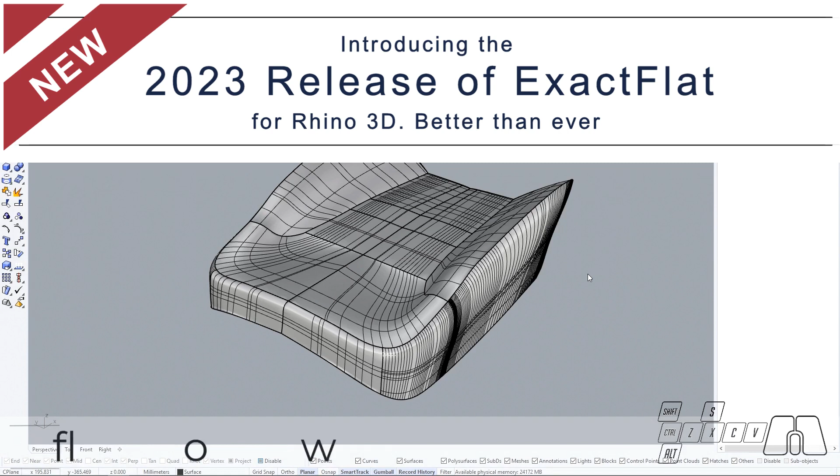During today's video, we're going to be covering the upcoming features that are going to be available in the next ExactFlat release. We're going to go through a full overview of the ExactFlat workflow, and we're going to use this car seat 3D model as an example file.

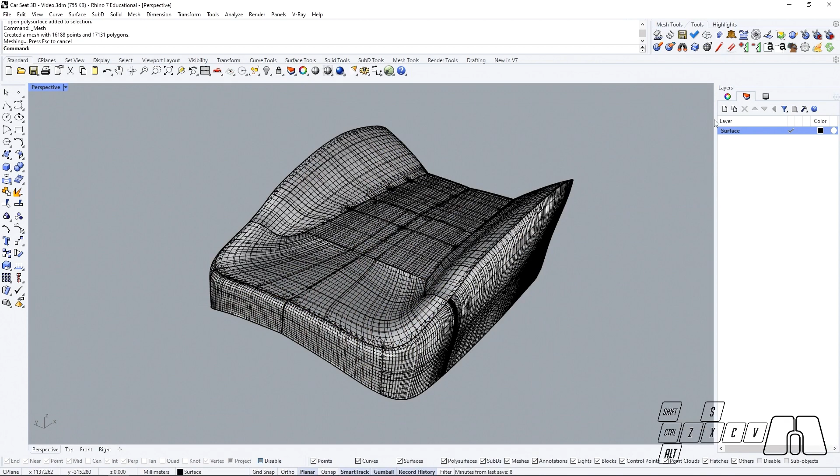To get started, we're going to transform our NURBS object into a mesh. Then we're going to create a new layer and call it mesh, select our mesh that we just created, and change the object layer, then hide out the original surface that we had.

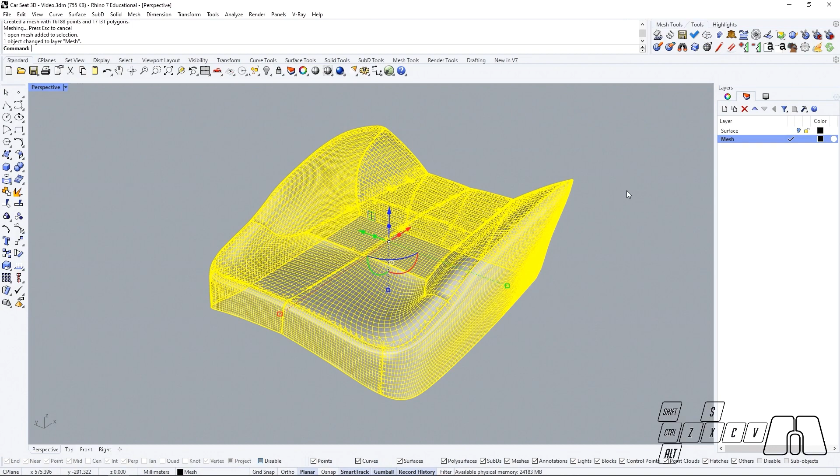Now that we have our mesh model here, we're going to explode it and join back the pieces that should become single pattern pieces on their own.

Now that we have joined our pieces, we're going to select our mesh model and weld it. Leave an angle tolerance of 180 and hit enter to confirm.

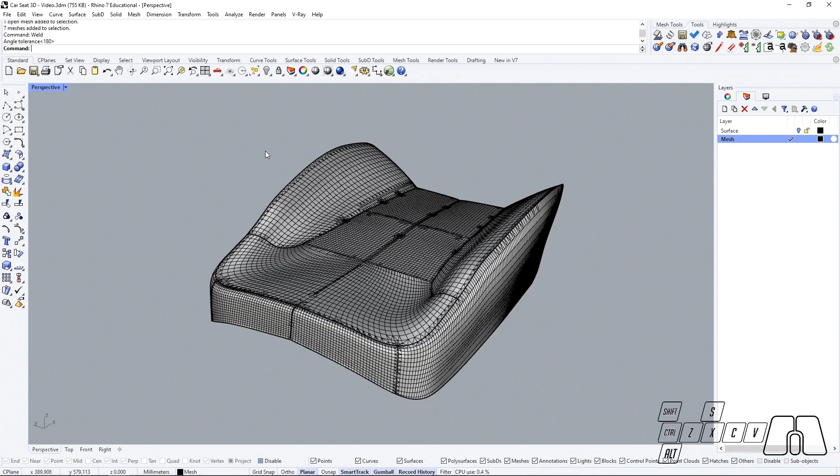Now that our mesh model is ready, we're going to duplicate our mesh layer and call it adaptive Remesher, just for keeping our model organized. I'm going to switch to the new layer that we just created and leave the old mesh layer as a backup.

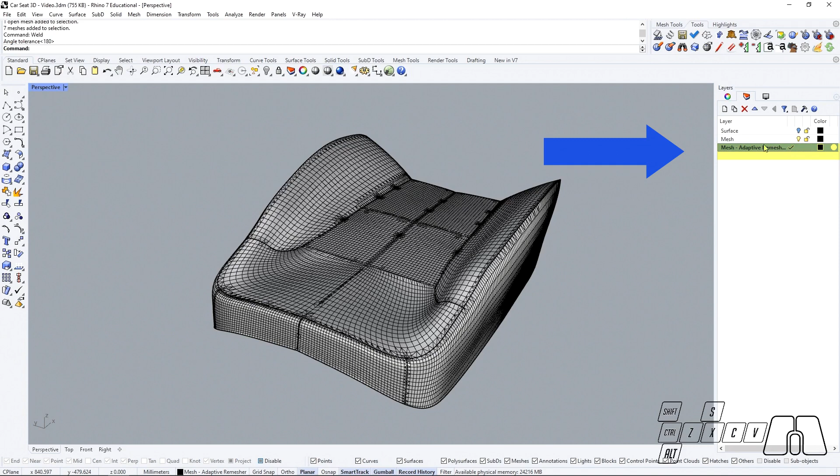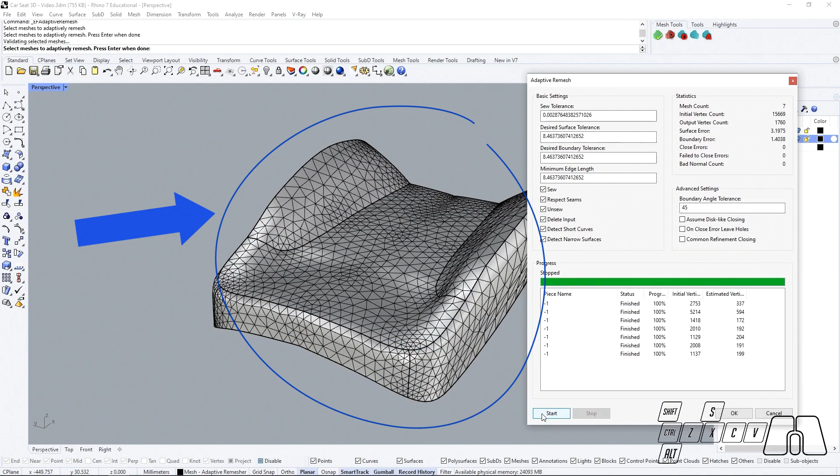Then I'm going to go to the ExactFlat mesh tools and use the adaptive Remesher so we can transform this mesh into a more efficient mesh that we can work with. I'm going to start the Remesher and hit OK button to confirm.

Now we can get started with the flattening side. I'm going to go to my tools, select the ExactFlat flatten command, select our mesh, and hit enter.

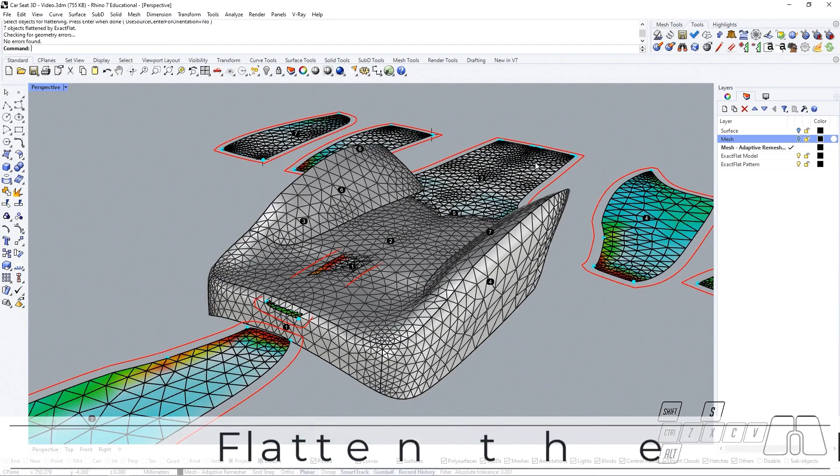We can see now that we just created two new layers. One is going to contain the ExactFlat model and the other one is going to contain the ExactFlat pattern. I'm going to switch to the ExactFlat pattern layer and hide out the original mesh that we had.

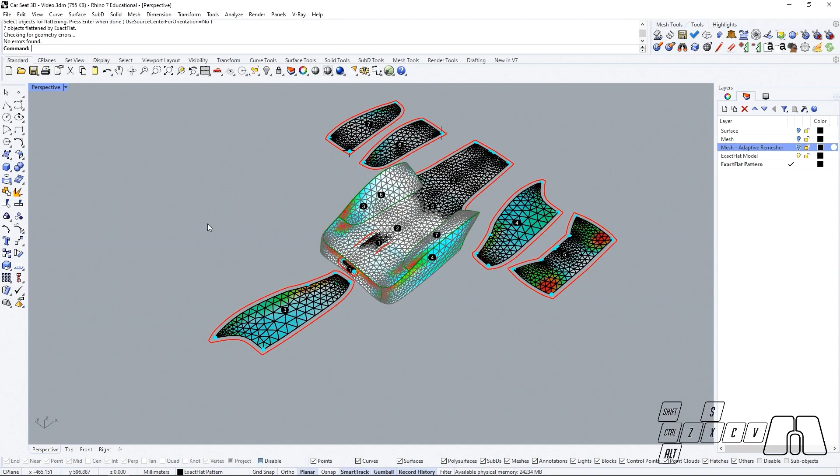Then we can switch to the top view. Now we can select our ExactFlat patterns and move them aside.

When flattening our pieces, now we can see a preview of our seam allowances that are going to be offset from the pattern boundary edges. The default offset distance can be set up under the ExactFlat patterning options.

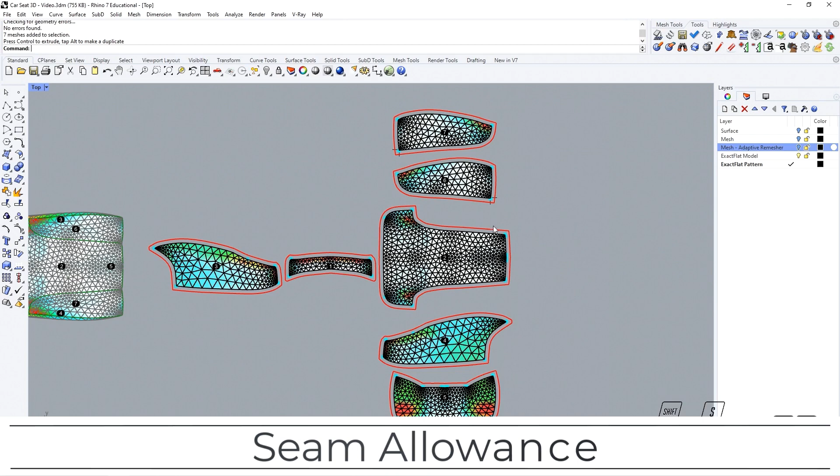Now that we just started with the flattening process, we're going to move forward and optimize our pieces normally. So I'm going to pre-flatten them.

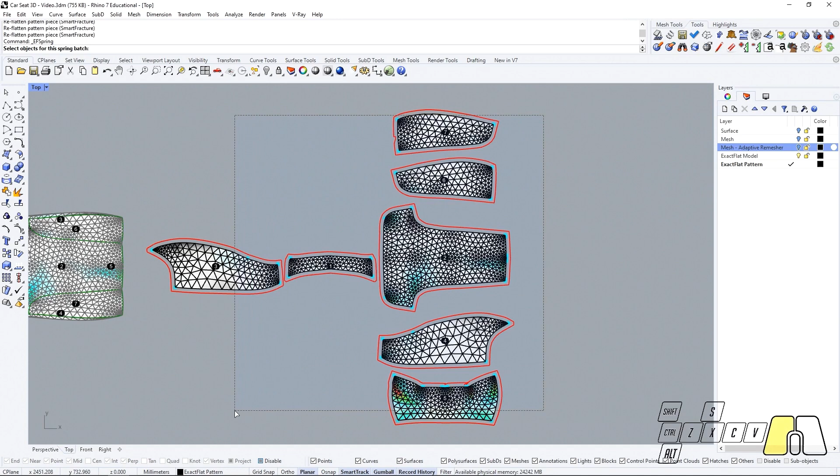Now that we pre-flattened our pieces, we can use the optimizer. I'm going to select all of my pieces, and we'll see now that when optimizing our pieces, ExactFlat supports multi-threaded optimization, which means that our workstation processor can optimize several pieces at the same time, depending on the amount of threads that your processor can handle.

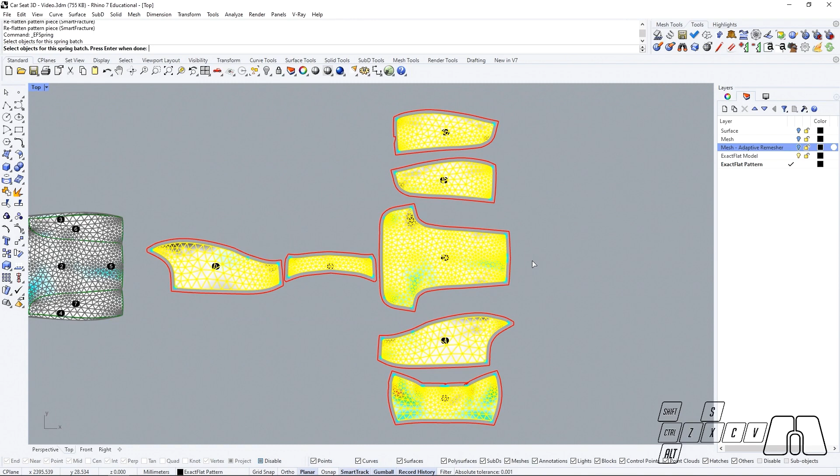So I'm going to hit enter, select a cotton material as a default, and hit OK to confirm. Now we can see that all of our pieces are being optimized at the same time, and that's performing much faster than with our previous optimizer.

We can also see that our accuracy report chart has been optimized as well, so now we can have a much cleaner view of what's going on with our pattern pieces.

We can see now the average energy density levels being displayed in Newtons per meter and with a percentage number as well. Then instead of a seam stretch error, now we can see a pattern perimeter length deviation, a pattern surface area deviation, greatest elongation, worst sag, and the minimum and maximum energy density levels, and our vertex count and triangle count. That way, we can follow up our pattern piece behavior more concisely.

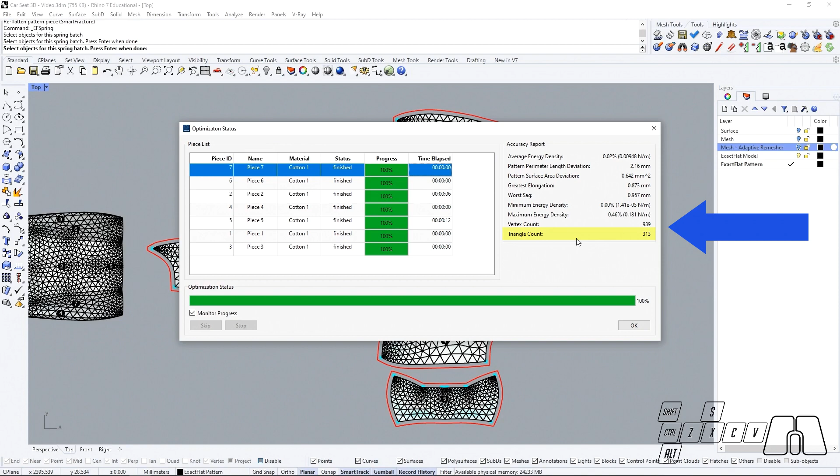Now that we have finished processing our flat patterns, we can hit the OK button to confirm. Now we can start applying some post-processing features.

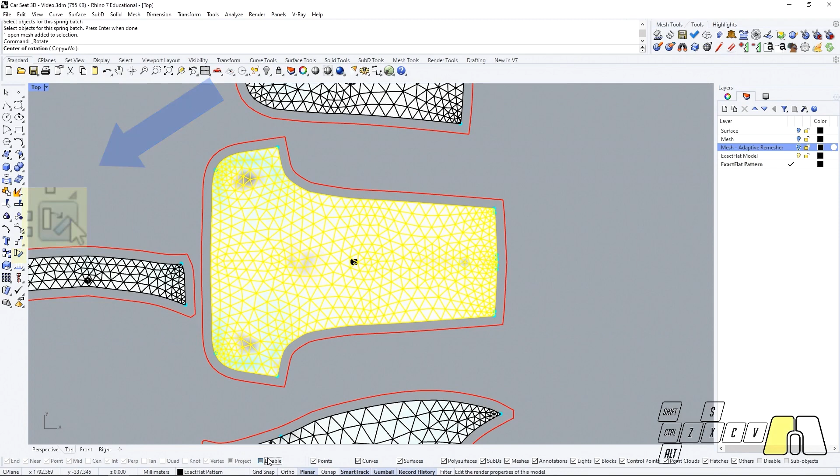I'm going to select my main part over here, and I'm going to rotate it with our regular Rhino commands, turn on my vertex snaps, and we can use the Find tool for placing our neighboring pieces.

Now that we have organized our meshes, we can take a closer look at our pattern boundaries and our seam allowances. If we zoom in, over here we can see that we have some blue dots at our pattern boundaries, and these blue dots are marking the edge split points that are going to help us define independent seam allowances.

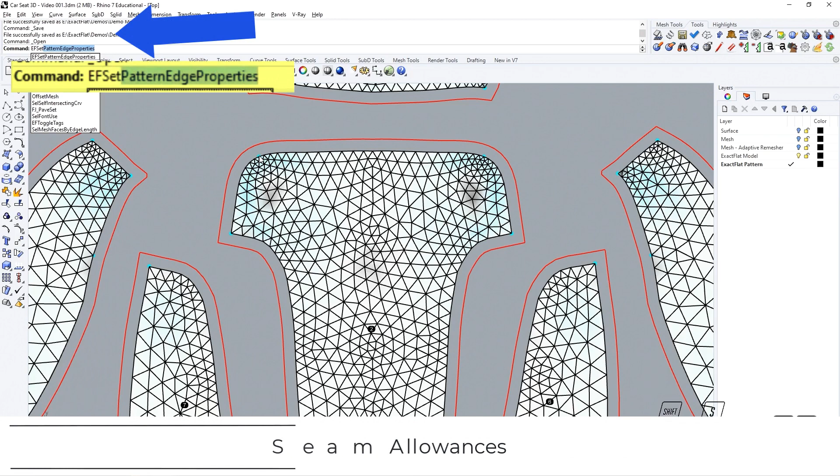So if we run the command ExactFlat set pattern edge properties, we are going to be able to set up our seam allowances with different features that are going to simplify our workflow downstream.

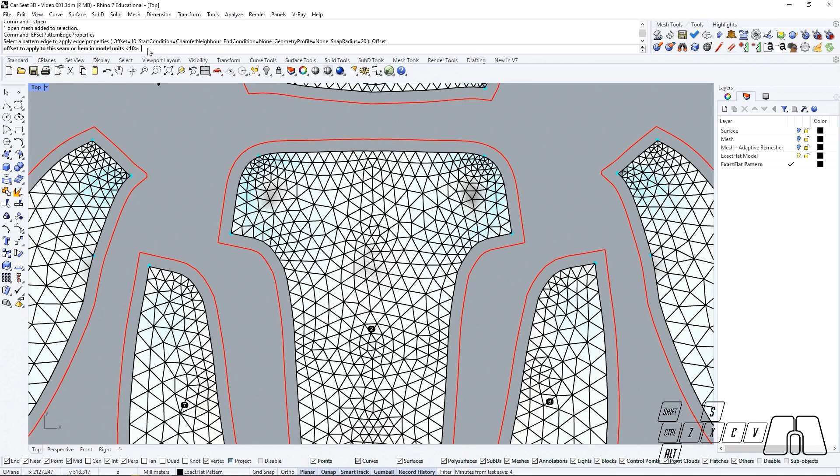First of all, we can see that over here we have an offset distance. If we click on the offset button, we can set up the offset distance that we want on that edge. For example, I could set this one up to be 5 millimeters.

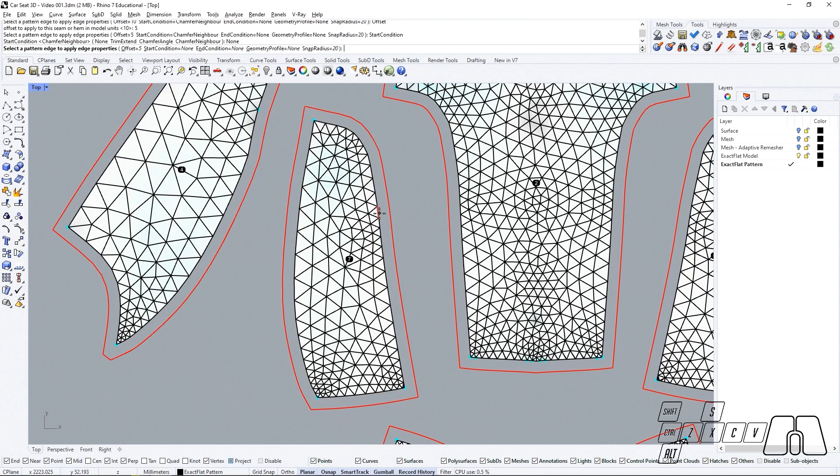And then we can see our start and end conditions. Our start and end conditions are going to change the way in which the seam allowance is interacting with the corners or our split points. So for example, if we take this piece and we set our start condition to none and our end condition to none, and our offset distance to 5, by clicking on this, we will have now this seam allowance set to 5 millimeters, and the none start and end conditions are going to set up these two split points to have this 90-degree edge start from the last boundary edge.

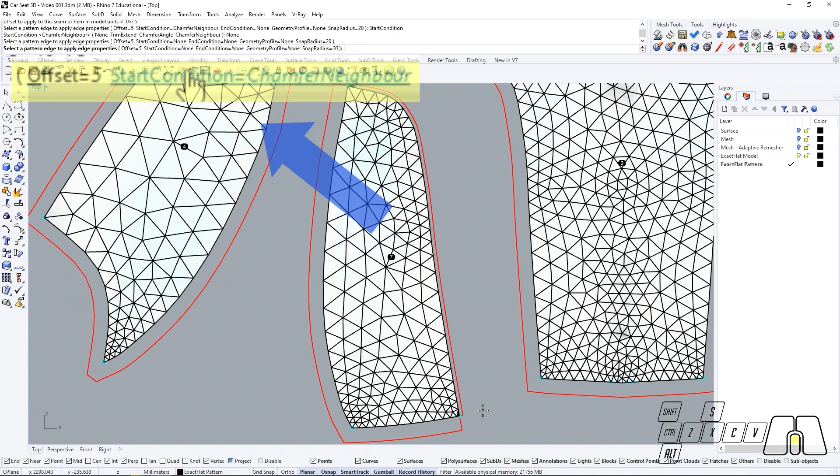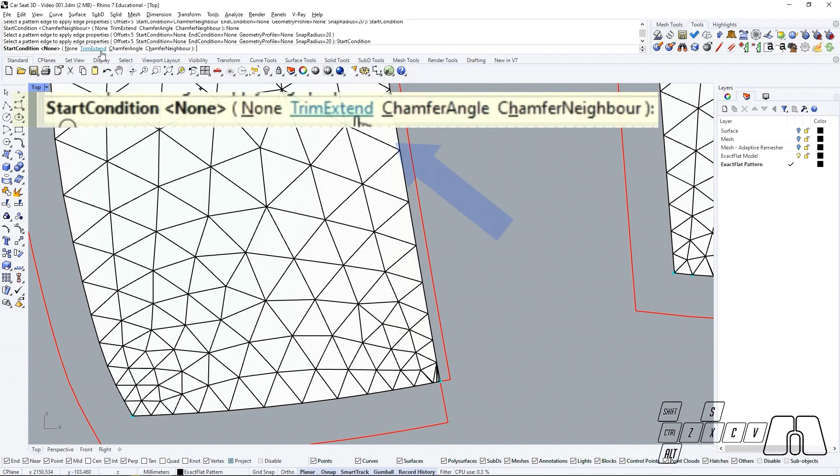If we change our start condition, that's going to change the condition for the split point that's located clockwise to the edge. And if we change the end condition, it's going to set up the condition for the split point that's located counterclockwise to the edge. So in this case, if we change the start condition to trim extend instead, and select this edge again, that's going to extend both meeting seam allowances until they connect to each other.

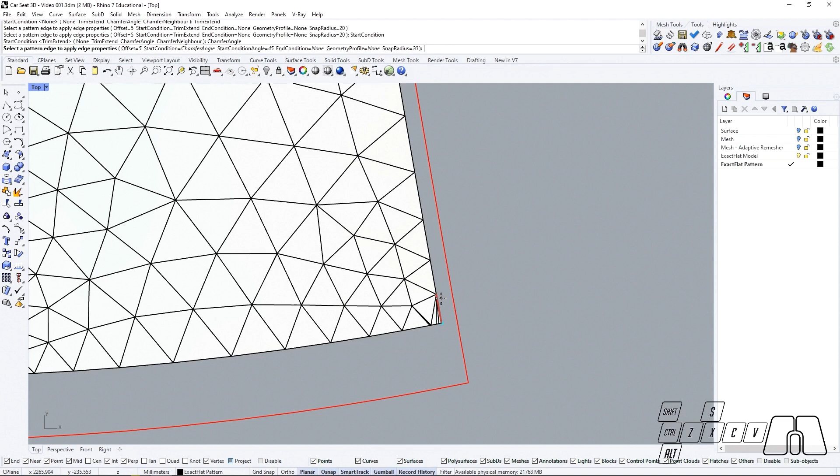If we change our start condition to chamfer angle, then we are going to be able to set up an angle that's going to start at the edge of the starting point of the seam line. So right now my start condition angle is set to 45. We're going to leave that for now, and if we select this edge, these two are going to have a 45-degree angle from both edges.

But if we change the start condition angle to 60 degrees, then that's going to change the condition angle for the starting split point. Then we can see that we have the chamfer neighbor option.

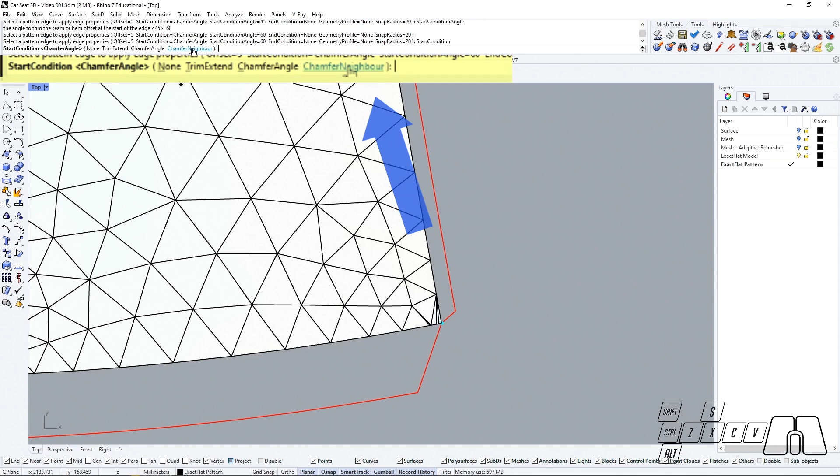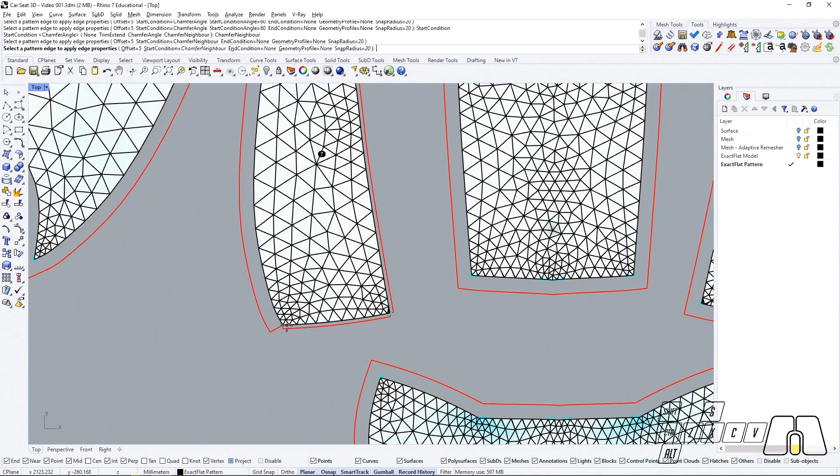The chamfer neighbor option is going to create a line that will let us fold our seam allowances. So once folded, our seam allowance will match the pattern edges. So I'm going to select this edge. It's very likely that we are going to see a greater difference if we have a greater angle.

So I'm going to select this piece instead, so we can keep on applying our start and end condition. So now we can see that if we folded this edge over this part, this edge should be touching this one, and this one should be touching this one instead.

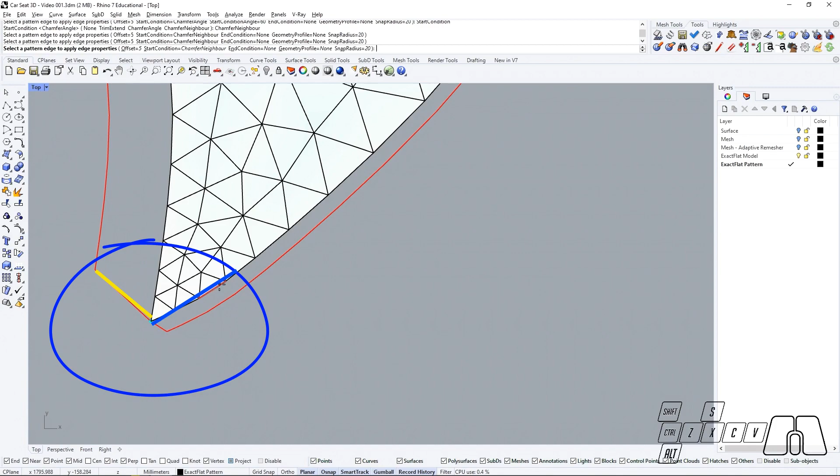So we could choose different start and end conditions, so that way, if we select an edge, that will be applied to both ends at the same time. And then we will have our geometry profile.

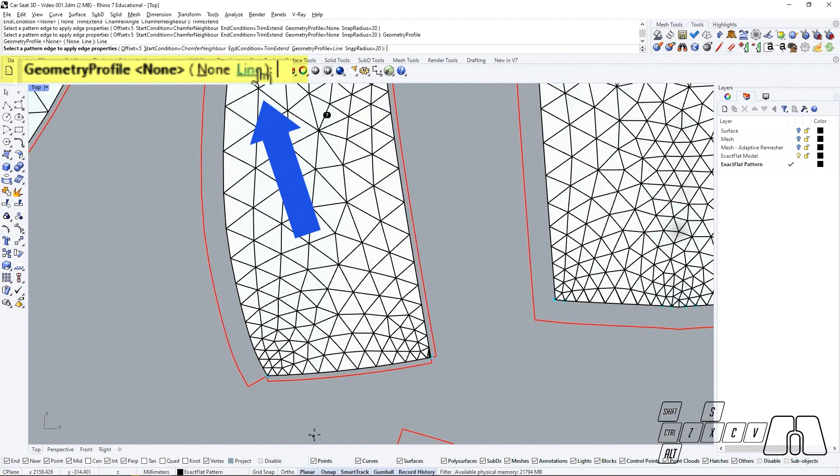So we can change this to line if we want our seam allowance to become perfectly straight. So if we select this one, now this will apply a start condition of chamfer neighbor on the starting split point. The end condition is going to apply trim extend on the end point, and the geometry profile is going to transform this curve into a straight line. So if we select this edge, that will transform it into a straight line instead.

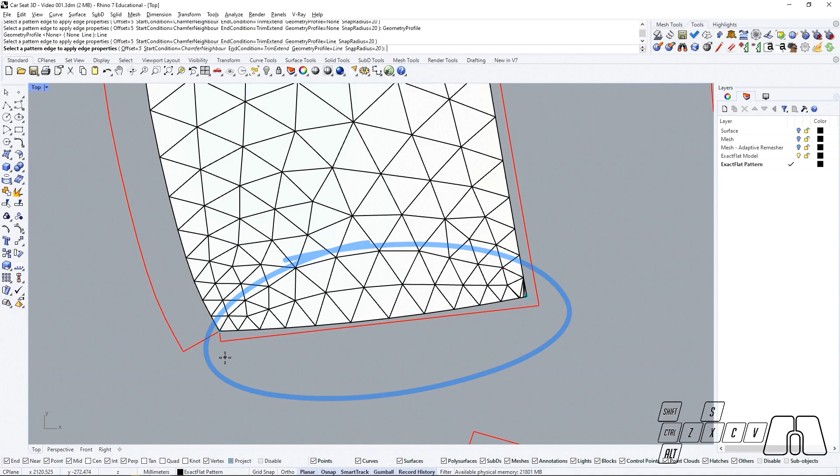If we wanted to add or remove some blue dots, we could be using the ExactFlat merge pattern edge command for removing the split points that we don't want to have.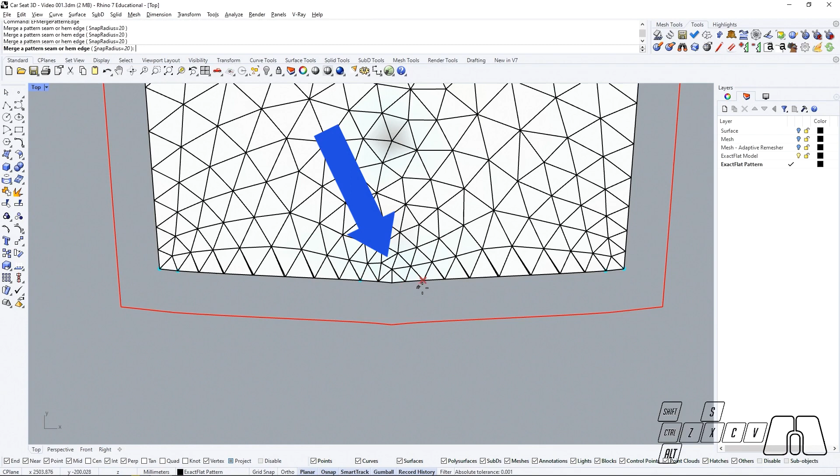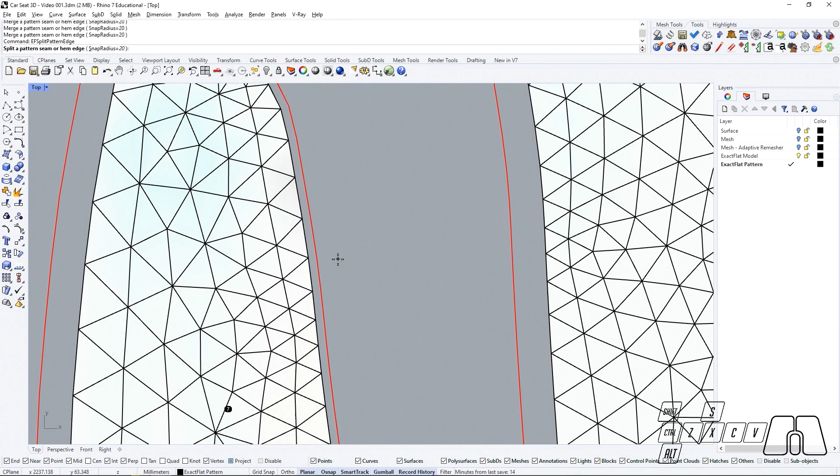We could also add more split points if needed by using the ExactFlat split pattern edge command. That way we could be adding a split point over there, and now with the ExactFlat set pattern edge properties, we could be changing the seam allowance for this portion of the edge individually.

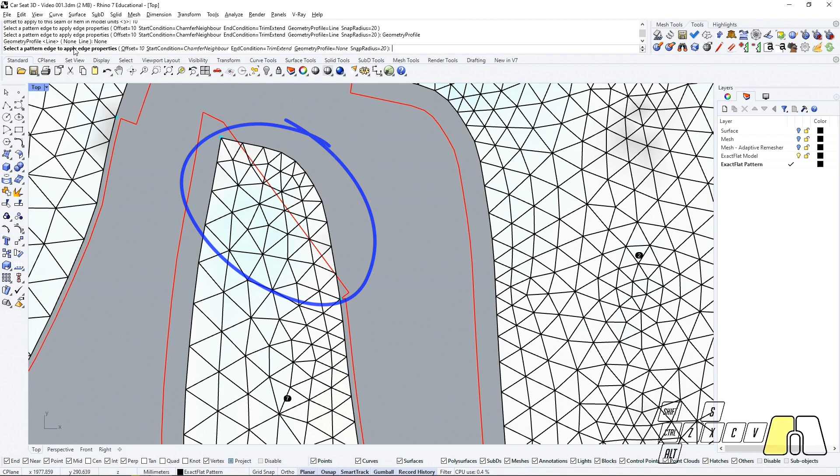So we can change the offset distance to something like 10 and apply it, and don't forget to change the geometry profile as required. In this case, we may likely use a chamfer angle for setting that one up.

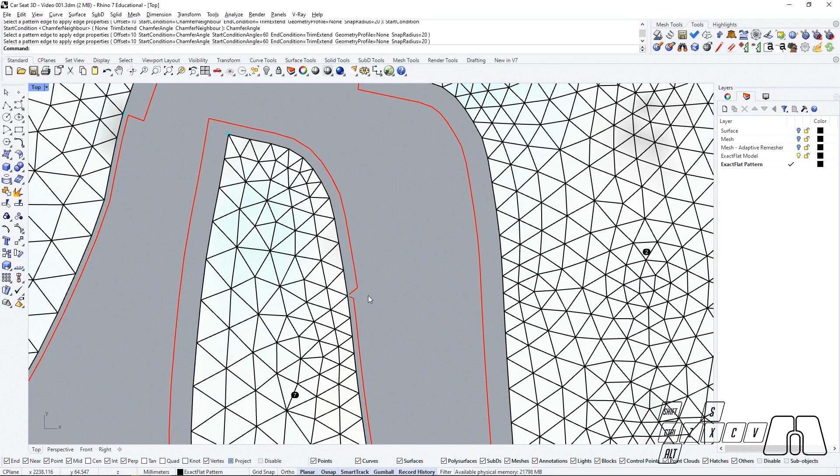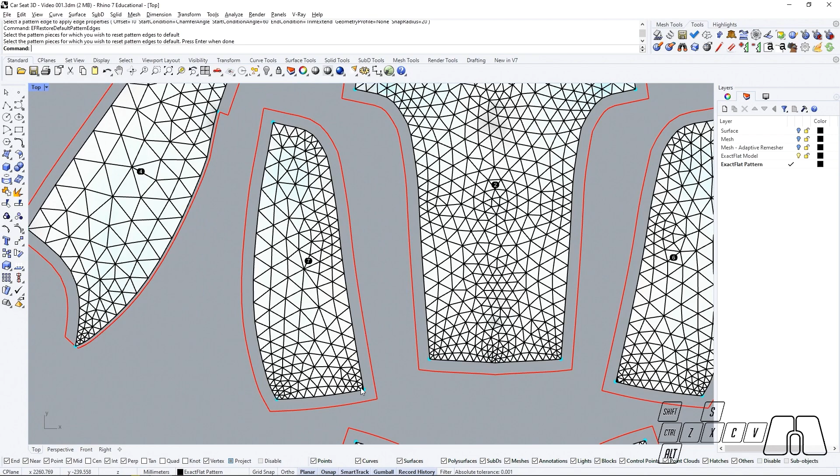Then if we wanted to restore our piece back to default, we could run the command ExactFlat restore default pattern edges command. And if we select our piece and hit enter, this will restore our piece back to its initial piece configuration. And the seam allowance that we will see will be the seam allowance that's been set up within the ExactFlat global settings.

If by the contrary, we wanted to remove all of our edge split points, we could be running the command ExactFlat split pattern edges. By running this command and selecting a piece, that will not only remove our split points, but that will remove our seam allowances as well. So from that point, we could start adding more split points as required.

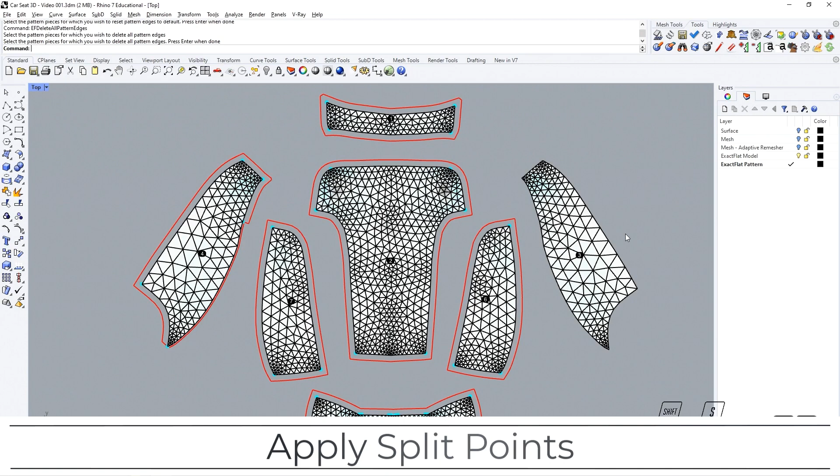If we wanted to save up some time when applying our split points, we could also run the ExactFlat split pattern edge break angle command. And by setting up a break angle, that will let us automatically apply some split points on our pieces. So for example, if I leave this break angle at 40 and I select my piece and hit enter, that will detect wherever we have a break angle of 40 degrees or more and apply a split point there.

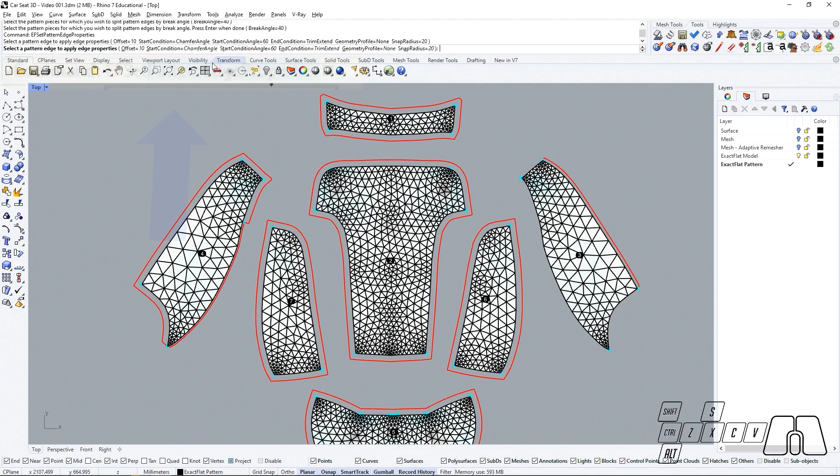So now that they are applied, we could start applying some seam allowances on each edge. So on this one, I could be selecting a trim extend condition for all of my start and ends. And I could change the offset distance to 30 on this edge and 10 for the other edges.

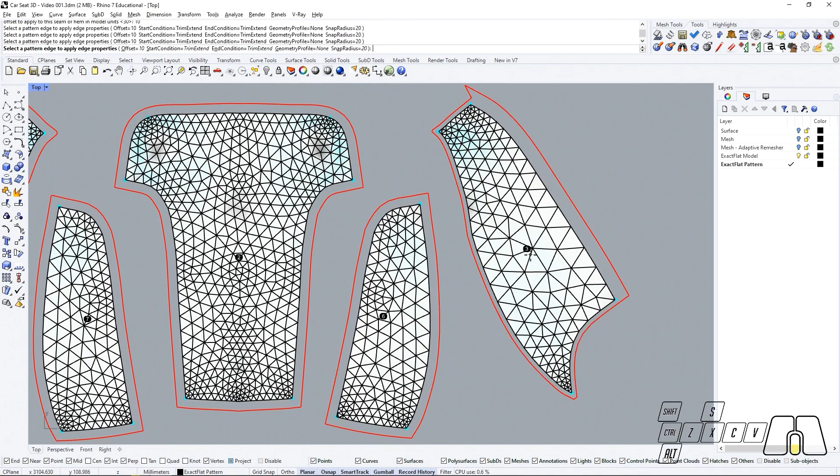On this corner, we can see that they do not perfectly match. So in that case, it may be better to use an end condition of chamfer angle, and that should fix it.

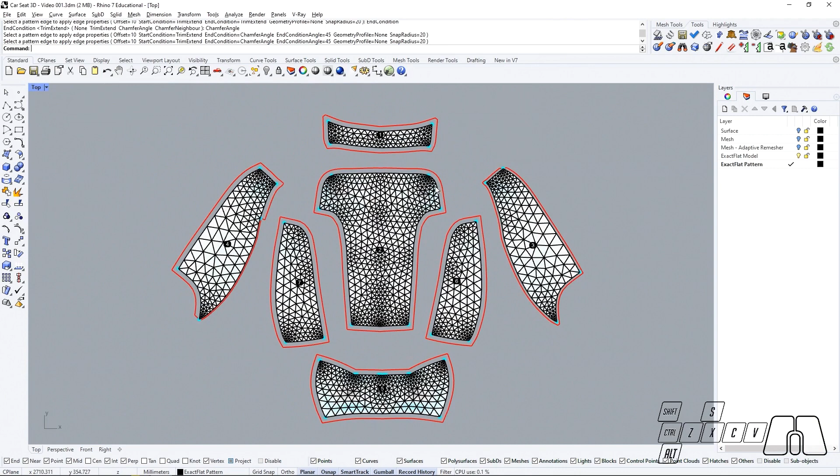So now that we have finished up setting our seam allowances, for example, I could be fixing up this part by, in this case, running the ExactFlat split pattern edges.

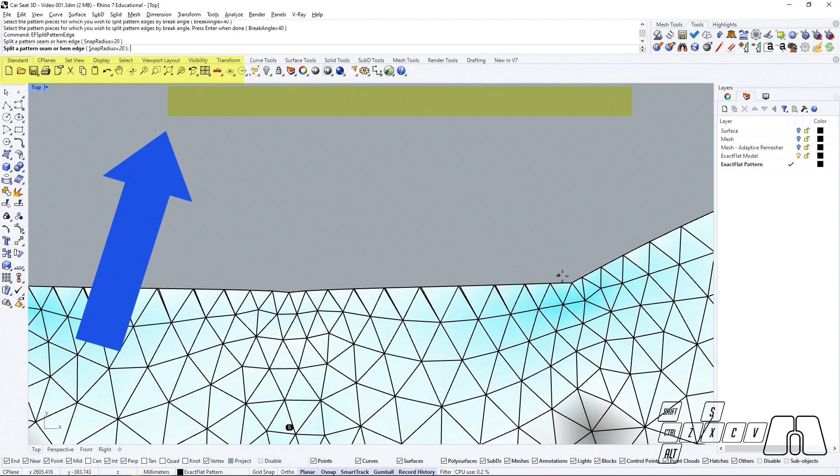Let's add some automated split points, and in this case we could be applying some more splits over here. By default, our ExactFlat edge splits are going to be applied wherever ExactFlat detects that you have a sewing line. In this example, ExactFlat was detecting different sewing lines because of the way this model was originally set up. Now that we've applied our edge splits, we can continue setting up our seam allowances accordingly.

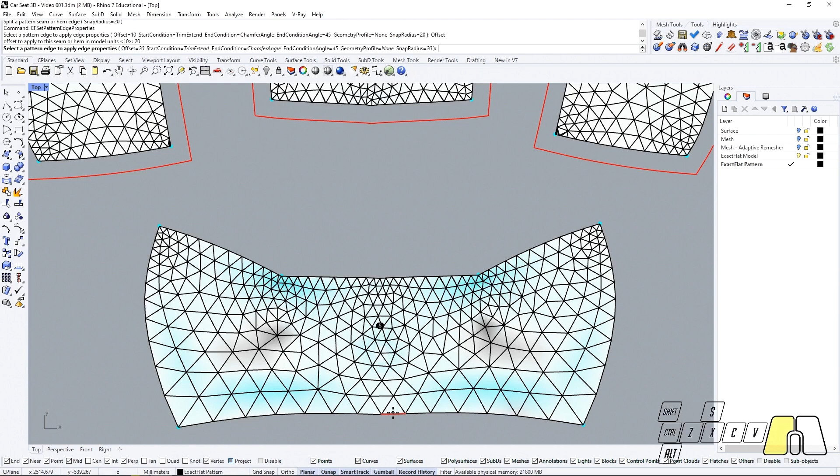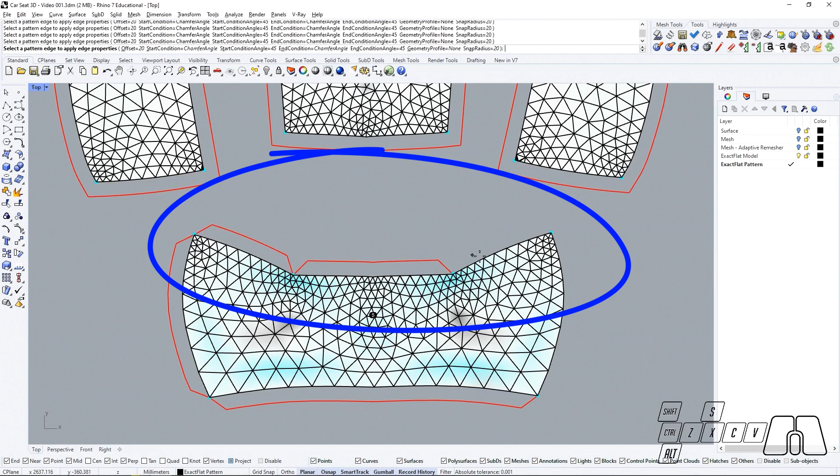In this case, we could set up and trim a start condition of chamfer angle and an end condition of chamfer angle as well, and set both to 45 degrees. We can also change the offset distance for the ones at the top.

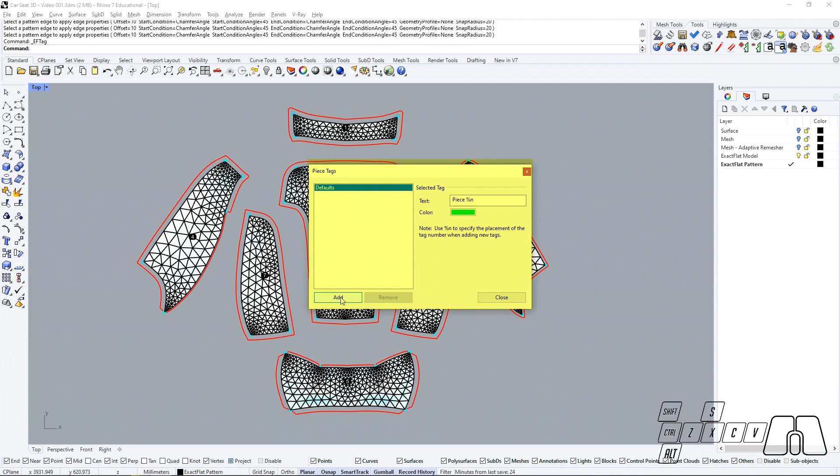Now that we've finished placing our seam allowances, we can move on and apply some notches and piece tags. If we go to the piece tag dialog box and leave this value by default, that's going to automatically number our pieces accordingly.

Now that we have applied our piece tags, we can move forward and apply some notches as well. I'm going to apply some I-type notches on this side and some V-type notches on the other side.

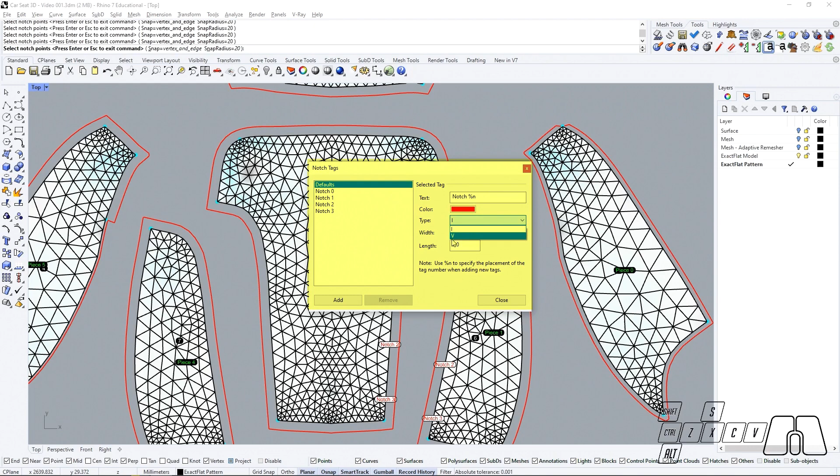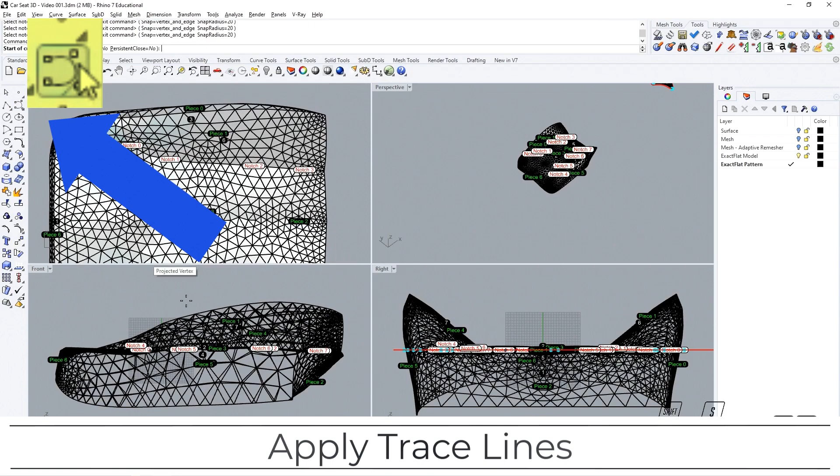Last, we could apply some tracings if needed. So we could go back to our 3D model, draw a simple spline, which could be marking the location of a Velcro. I'm going to use the ExactFlat trace tool for applying a trace line.

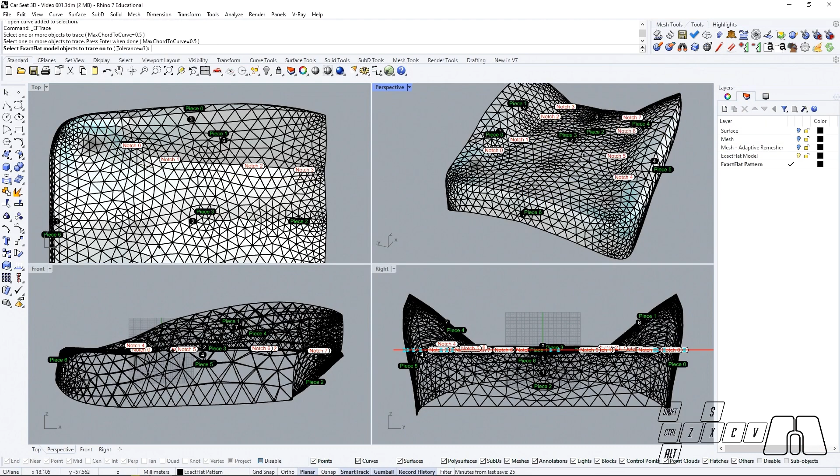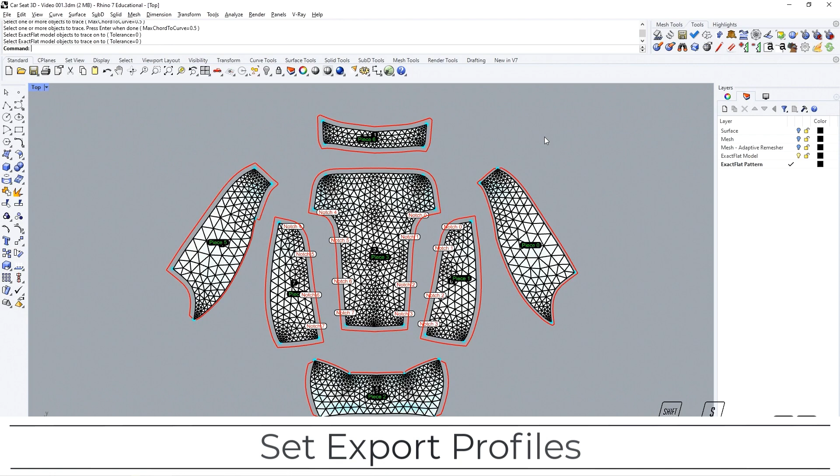Now that it has been flattened, we could move forward and start setting up our exporting profiles. In the upcoming release of ExactFlat, we are now going to be able to set up different export profiles. Depending on the cutting machine you are using, you'll be able to fully customize the way your files are organized.

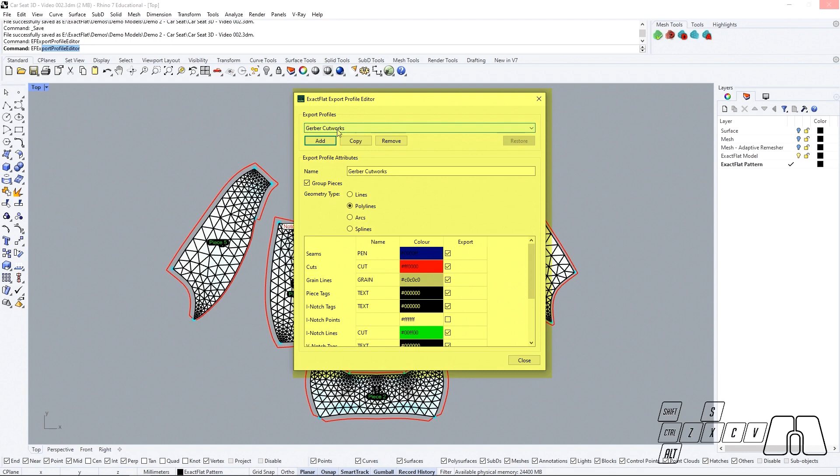If we run the command ExactFlat export profile editor, this will let us select between the different export profiles that come with ExactFlat. If the cutting machine we wanted to use was not in this list, we could add our own profiles, or start from an existing profile and copy it, then change some features that were already set up. In this case, I'm just going to add a new profile.

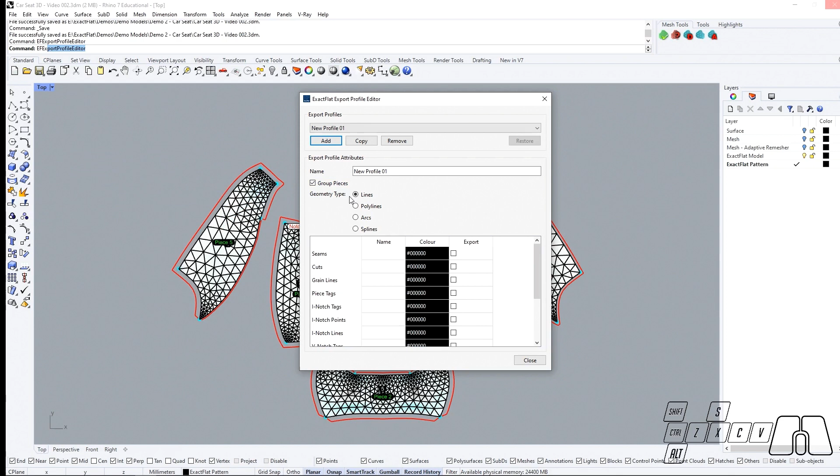In this new export profile, let's name it new profile 01. We will be able to choose between grouping our pieces or exporting them ungrouped. If we enable the group pieces command, that will let us export our pieces either grouped or into blocks, depending on the file format we select. Now I'm going to select group pieces, and under geometry type, we will be able to select between the different entities that will form our final DXFs.

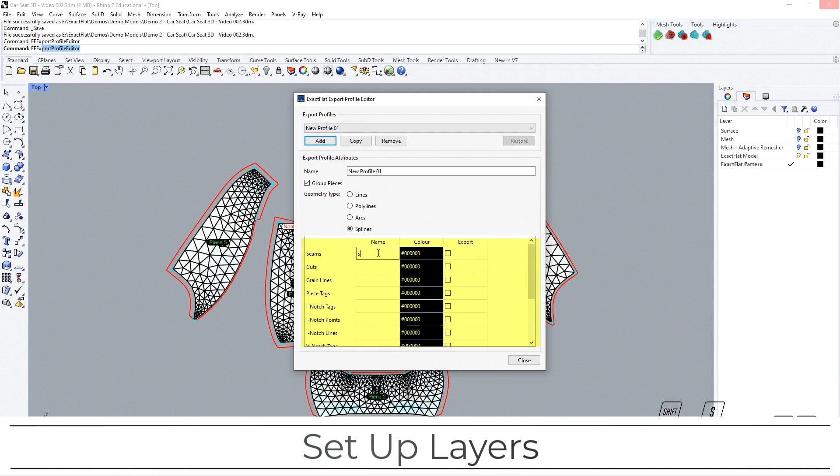In this case, I'm going to select splines, and down below we'll be able to place each of our features into layers and name our layers however we want. For example, I could call this one seam lines, then for cuts we could call this one cut, we could call our grain lines grain, then our piece tags, well, piece tags, and so on. Let's continue naming our pieces.

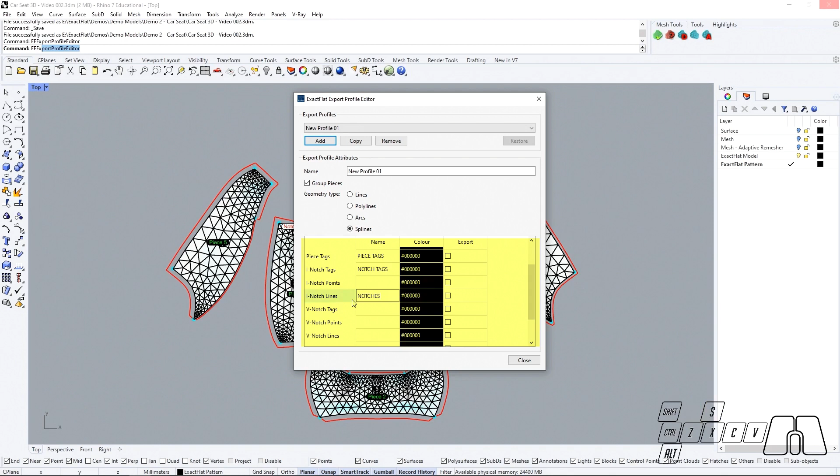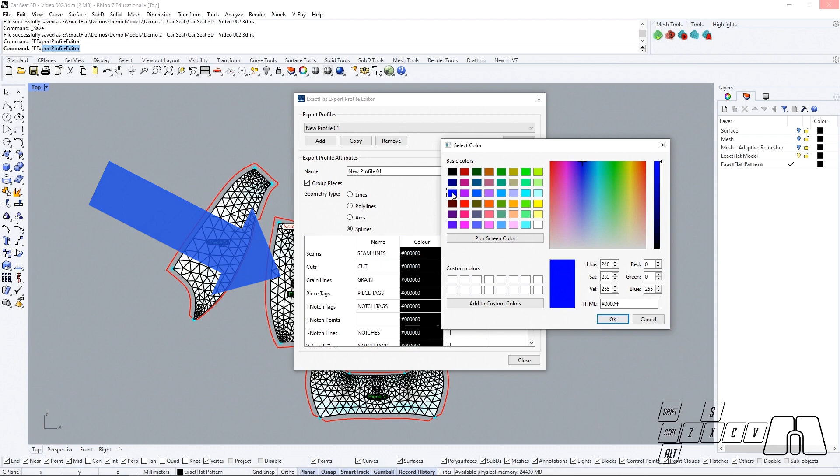Now that we've named our layers, we can change their colors as well. For our seams, I'm going to choose a blue color. For our cut lines, we'll use red instead. Our grain lines could have this orange color. Our piece tags are going to have green color instead, and our notch tags as well, this way these features go to the same layer. Our notch lines may go to the cyan layer instead, so our notches will go to our cyan layer. And our trace lines could go into the black layer.

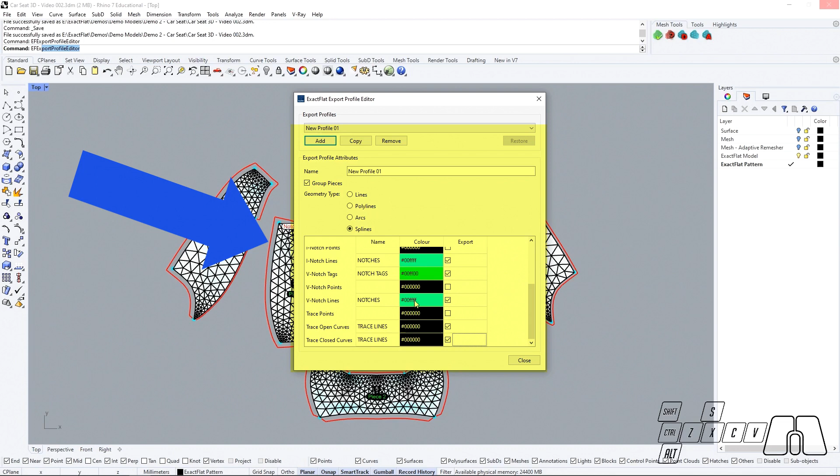Then we can choose which layers we want exported and which we don't want exported into our final DXF file. Now that we've customized our profile, we can close the ExactFlat profile editor, save our changes, and if we run the ExactFlat export command, we will be able to find our newest profile.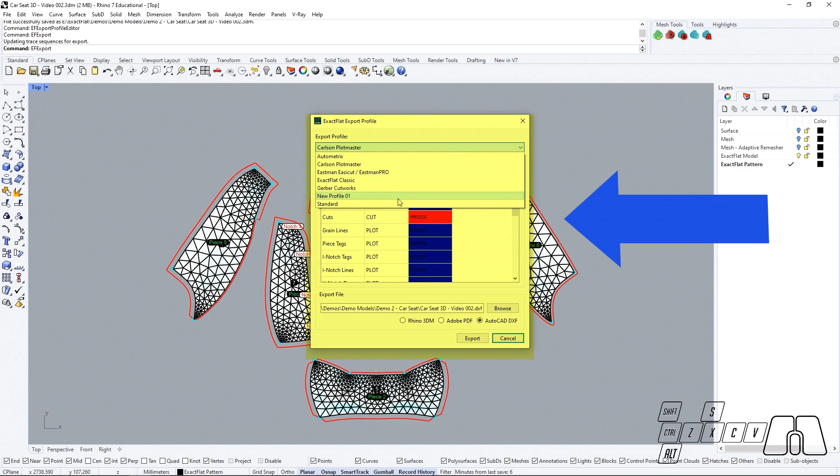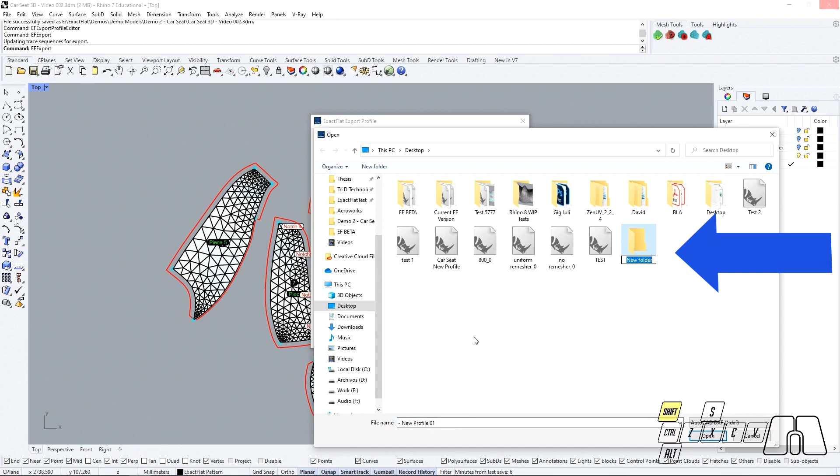So that way we can just place our file on our desktop and export our final AutoCAD DXF. In the upcoming ExactFlat release, we will also be able to select between DXF, PDF, and 3DM formats. So let's create a new folder over here and export one page.

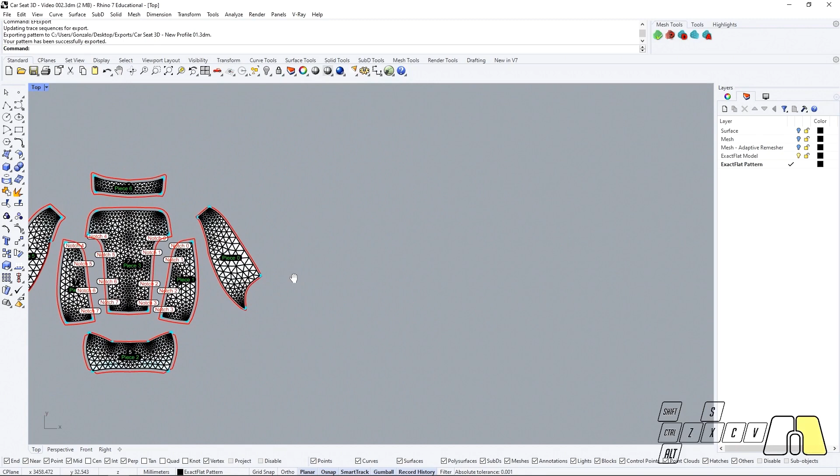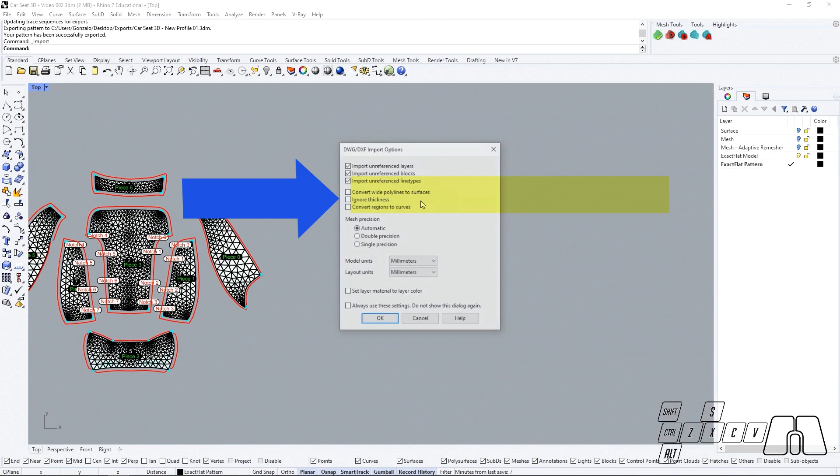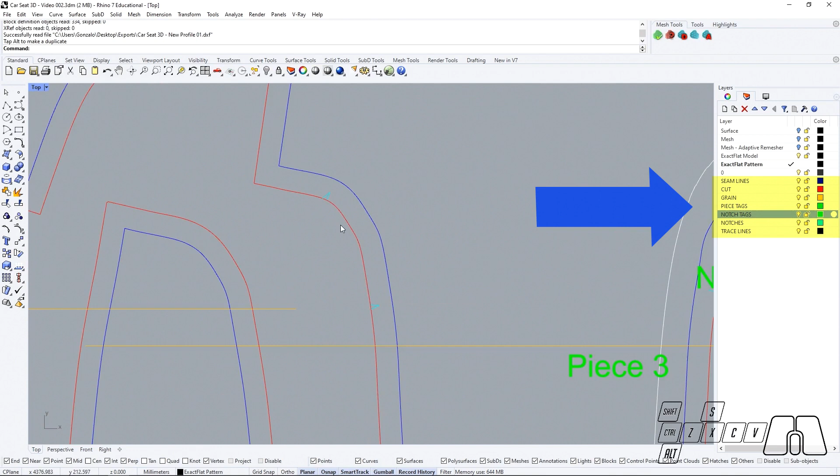So now we can import back our exported profile. Now that I've imported my profile, we can see that within the DXF file I just imported, all of our features are organized into separate layers. This way, you could assign different tools of your cutting machines for performing different operations.

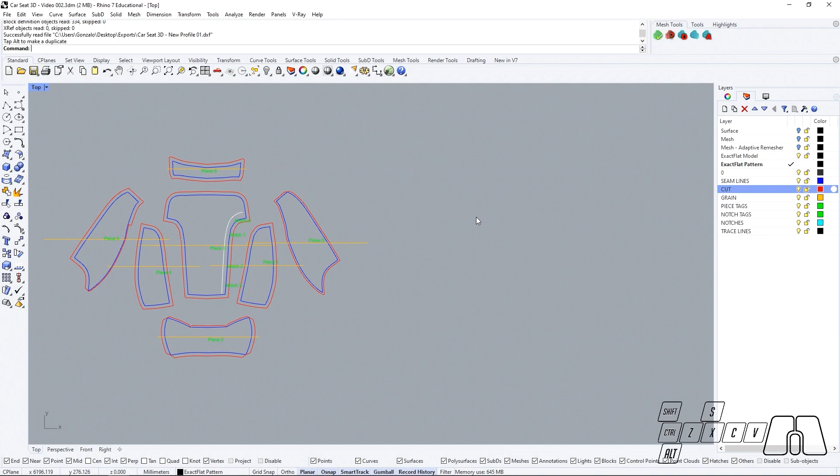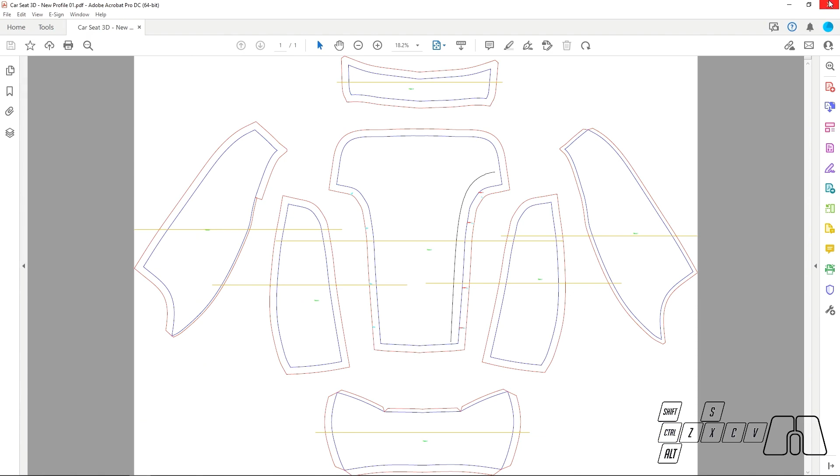Let's take a quick look at the other profiles we exported, as we will also have available a PDF file and the Rhino 3DM file as well.